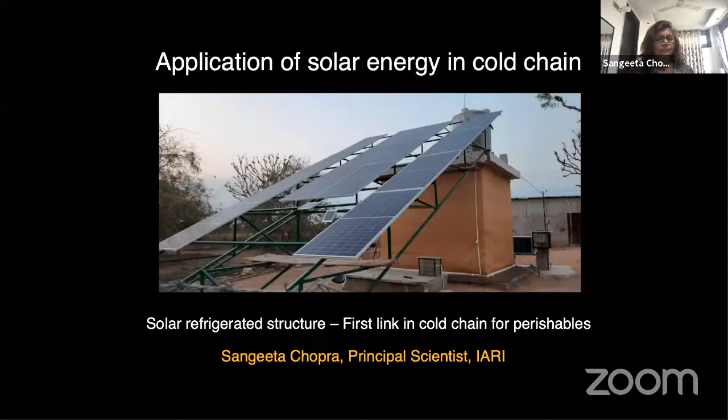The overview: in this presentation, I would briefly touch upon solar energy, solar photovoltaic panels, because that's very important when doing any work - the considerations, what characteristics we have to see, the inverters, a little bit about the cold chain, and the Pusa farm sun fridge that we have developed.

Many of you might know this, but just to remember: out of the total installed capacity in India of 382 gigawatts in March 2021, renewable energy sources, as you can see, the green part here is 25%, whereas coal is 55%. Photovoltaic energy out of this renewable energy contributes 8% of the installed capacity. Amongst the photovoltaic installed capacity, 90% is ground-mounted panels, around 7% is rooftop solar panels, and off-grid solar power is 3%, that is the solar water pumping.

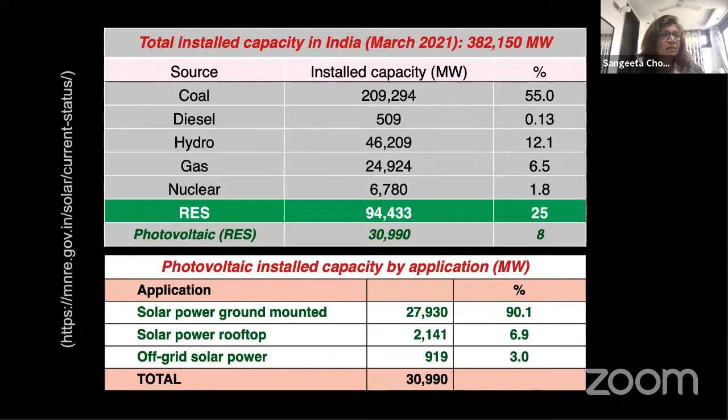That was the installed capacity, and this is the power generation. Electricity generation in India is around 100 billion units per month, out of which renewable energy contributes 10% of the total electricity generation - 11,241 million units. Amongst this renewable energy, you can see these bars, comprised of wind, solar, biomass, bagasse, and small hydro. The orange bar is solar, and the contribution is increasing every month. In February 2020, solar photovoltaic systems produced 5085 million units, around 5% of electricity per month.

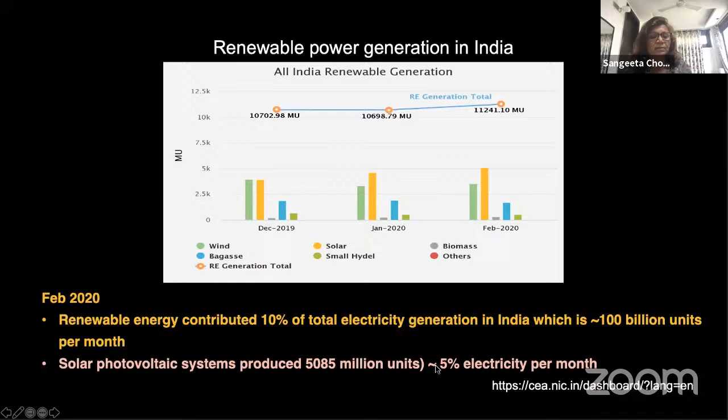Solar energy in India - we are endowed with a large amount of solar energy potential. The solar insolation is around 1,000 watts per meter square. About 5,000 trillion kilowatt hours per year of energy is incident over India, and most parts of India receive 4 to 7 units per meter square per day. That high amount of solar energy is here, and it's surprising that we have not used it. We should be using it more often for our cooling, processing plants, or any other systems we may want to run.

The primary part here is the solar photovoltaic panels. Just to revise a bit: it's made from crystalline silicon, absorbs photons from sunlight, releases electrons, which generates DC current. Each photovoltaic cell has an operating voltage of 0.5 to 0.7 volts. They are connected in series, and many of those series strings are connected in parallel. When connected in series, the voltage increases, and these strings in parallel increase the current - that's how the photovoltaic panel is made.

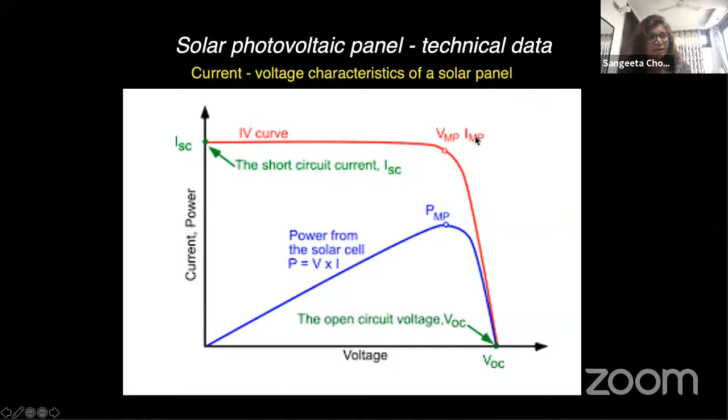This is one of the most important characteristics of a solar photovoltaic panel - the current voltage characteristics. You can see the open circuit voltage, VOC, is important - that's when the solar panel is not connected to any load, and if you connect a multimeter, that's what it gives. If it is completely connected without any load, then it's the short circuit current. Between these two, we mostly want to operate the solar panel at maximum power. PMP is the maximum power, obtained from VMP, the maximum voltage at maximum power, and the current at maximum power. These are the important characteristics.

Oops, sorry. Give me a minute, man.

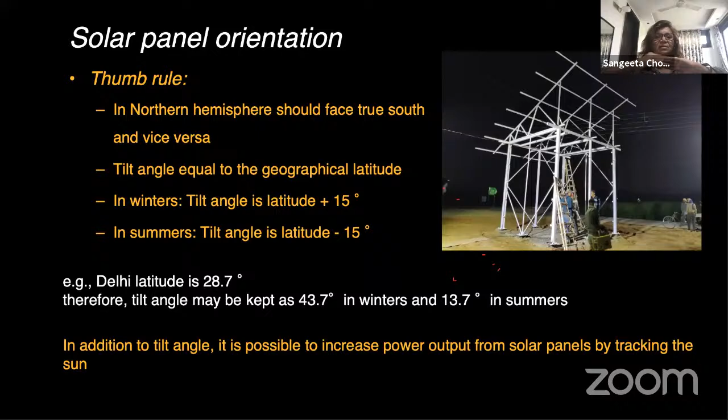Now, in addition to the tilt angle, we can also increase the power output if we are laterally changing along the solar panel, along that plane, towards the east or towards the west. So in the morning, the entire panel can face the east, and then keep tracking it and turn the other side to the west. That is possible.

I would like to show that these are called panel trackers, and they're on a mount that can follow the sun for getting the maximum sunlight. I wish we can do that easily. This increases, mostly you can get increased harnessed energy of around 15% in winters and 35% in summer, maybe a single axis or dual axis tracking, the automatic solar tracking controllers.

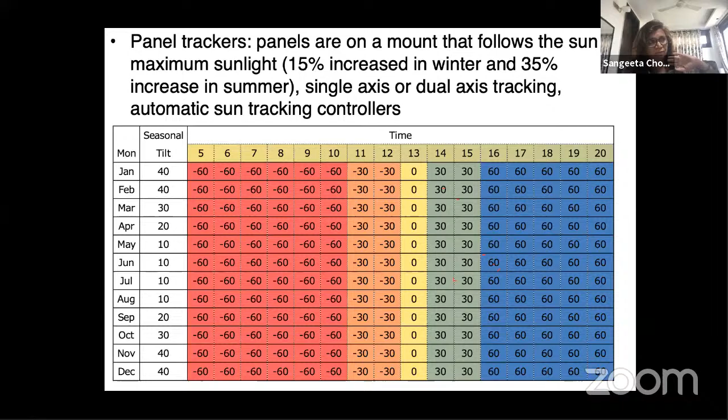So minus 60 is more towards the east. The entire panel is facing the east sun, and then that goes flat, keeps turning, and is right overhead, like 0 degrees looking upwards. That's around 1 o'clock, and then going towards the west to 60 degrees. So that's how I'm showing minus 60, minus 30, 0, 30 and 60 to the west. That's another way, and that is being done at places.

Okay, I want to go to the inverters next, because that is the next important criteria we would like to consider or match. It's very important to match, we may say impedance matching, or match all the specifications of the entire system. Various kinds of inverters are available, and we've been searching for them for a long time. Some of them do not suit our purpose for villages, but some did.

The first one we can see here is an off-grid inverter, which requires a battery. It's off-grid, meaning it has no electricity connection, but it requires a battery, so there is no operation without a battery. There are some specifications for a 5 kilowatt inverter - what is the battery voltage required, this is for one particular inverter. But what's important is that if I take out the battery connections, this inverter does not give an output, even if the solar panel is connected. So it's as if the solar panels are charging the battery, and then we are getting the output. Battery is an essential component, it works without electrical supply - that's what should be there. There's no operation without battery, and it does not need a grid.

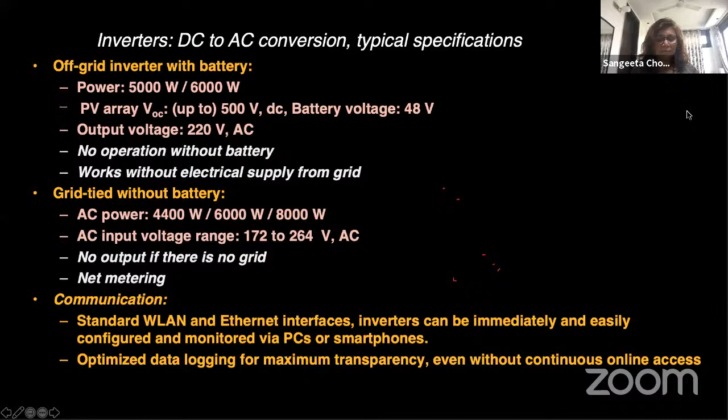Okay, it was simple. So the inverter that I am using is actually a hybrid inverter, but I am not using a grid and I'm not using a battery. Very few suppliers in the world are making this. Some of them claim to have this inverter, but when I bought them, they didn't work. So the inverter that I am using is around 5 kilowatt.

The maximum input I can give is around 500 volts. The battery specifications are written, but it can operate without a battery. It can also operate without grid - does not need battery, does not need a grid. I can use a grid if I'm constructing this structure in a village where there is some grid and we can get that advantage. I can use that. But honestly, in some villages where I've put systems in Haryana, the grid quality is so bad that my inverter got destroyed, because they have all kinds of wires hanging onto the village electricity supply. So that destroyed my inverter also.

Input voltage 220 volts, we do not need it. Presently, I'm not using battery, I'm not using grid, just solar panels, and we get an output of 220 volts. By far the best system that I have seen.

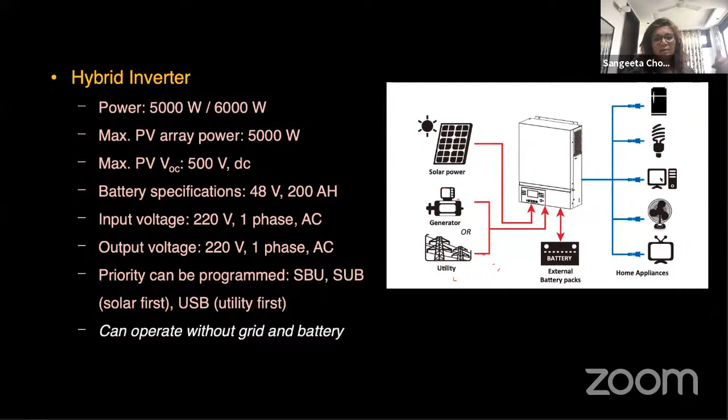And of course, if I'm connecting all three, there's a program, we can program it to solar first. So it is either solar first, battery - SBU is solar first, then battery, then utility, that is grid. Or it can be solar first, utility or battery, or it can be utility, solar, and then battery. That's how it will take the power. If the solar is less, it will take from the grid. But it can operate without any one of them - it can work just on grid, just on batteries, or just on solar.

Cold chain for perishables - we all know that a cold chain is required, and my team's effort here is to establish the first link in this cold chain: a cold storage that works without electricity and does not need batteries. And of course, then there's transport, processing and distribution.

I would like to say that we have pumps running in our place where there's no electricity, but this structure is working, for example, in Ajmer, Rajasthan, in Picholia village. So we are running the motor for washing the panels from the solar panels, and this is a 5 kilowatt system.

So if the structure is not in use, we can totally run some small processing machine from the same system. If we can run an air conditioner, we can run a machine too. And we are running motors and pumps for washing the panels and using the water. There's no electricity connection on that farm yet.

Now they have electricity.

Now you can see the same structure which I showed you, the frame. This is the Pusa Farm Sun Fridge, cold storage for farmers. This has been built on the Mela ground, built this year in the month of February for Kisan Mela. It was built in just 20 days and is working till today.

It is being used for storing produce from CPCT. The protected cultivation division, which is just behind the Mela ground, has a lot of produce and they sell in the market. But before they sell in the market, they often keep their produce in the sun fridge now.

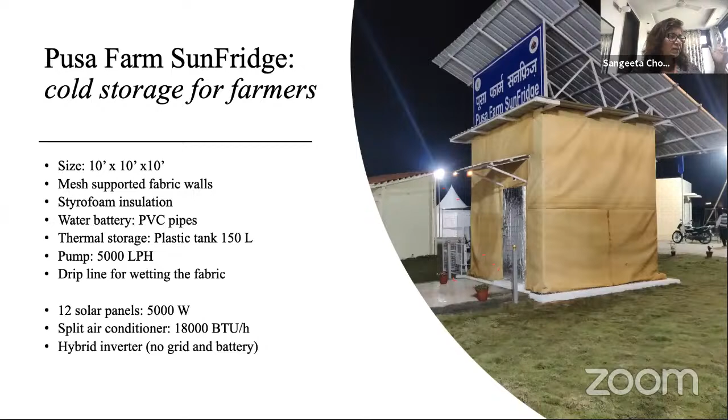We are using a pump here of 5,000 liters per hour, a drip line for wetting the fabric. In this, I've used 12 solar panels, each of 415 watts or so, a split air conditioner, and the hybrid inverter that I've talked about, without the grid and without the battery.

We've pulled out the circuit board inside and modified it so that we can get 2 to 3 degrees during daytime, and it goes up to 8 to 10 degrees at night, because at night there is no active cooling, it's just passive since there's no solar energy. So this is off-grid and batteryless, with a split evaporator coil and water battery for nighttime cooling - it automatically starts and automatically stops. As soon as there is solar energy, it starts by itself.

Now, this sun adaptive controller is something that we have devised. This is an important part of this structure, because if there are clouds or less sunlight, our system is going to draw less power. We've modified it so that the compressor and the air conditioner do not demand power if there is less sunlight. We are sensing the sunlight, and we've programmed it so that it asks the compressor to demand less power. That's how it continues to run and does not go into error.

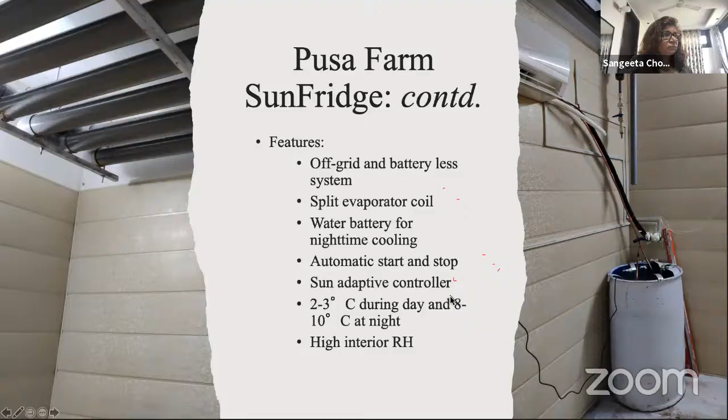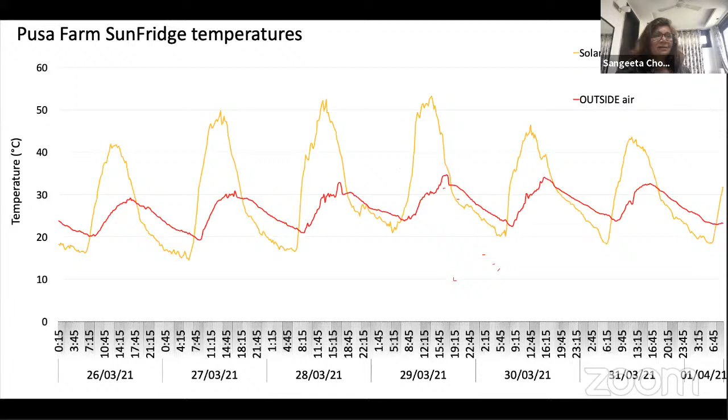The yellow line here now shows you the solar panel temperature. So you can see when the ambient is like 30 on a particular day, the solar panel temperature, this is the actual real data, goes more than 50. I know from my experience, I've seen this temperature of the solar panels shoot up to 60, 65. It's uncomfortable, but that's how it goes.

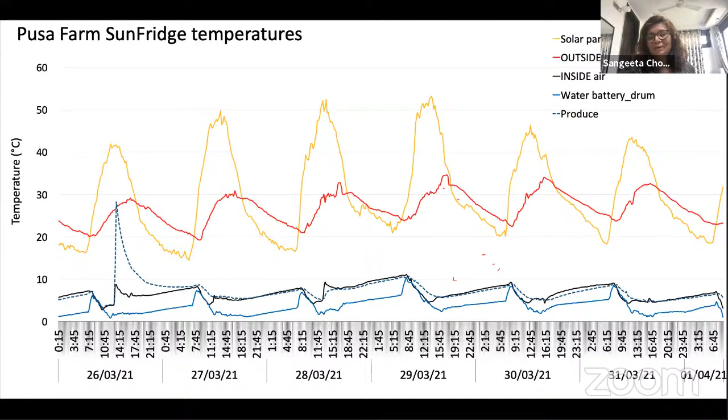What I can see is we are publishing the data. It's almost like 4 times that of ambient is the shelf life. And it's just like a refrigerator that you have at home, and better, because the RH, relative humidity, is pretty high.

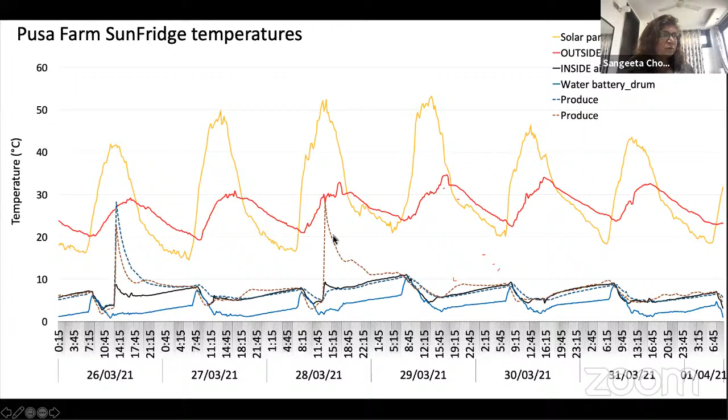And this is the other produce. Of course, we kept another produce, we keep putting produces. All these temperatures are measured by thermocouples. And this is when we put the produce again, and we've been doing this a lot lately.

But I think it's important to consider here that it is very, very important to decide whether our panels can withstand that wind speed. We don't want them blowing away if there is high wind. So the structural strength, the wind speed, the weather, the latitude are very important.

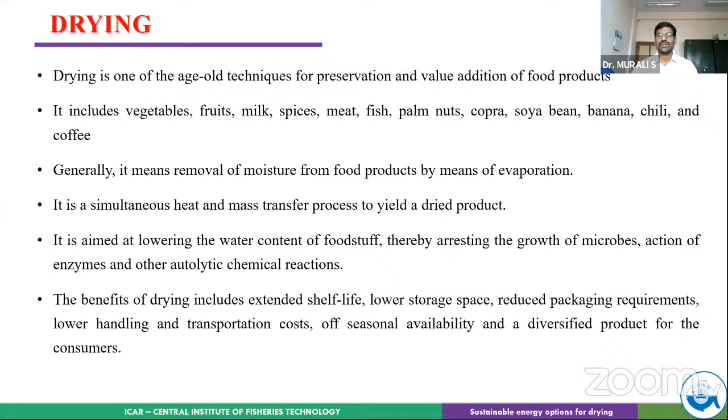So when we do the drying, the end moisture content will be low. In turn, that will help us in storing the product for longer time. There is extended shelf life, lower storage space, reduced packaging and handling requirements. Mainly, we will be able to give the product during off season. In addition, we get a value added diversified product that meets some of the consumers' demand. For example, in fish, some people like the dried fish, not the fresh one. So it is like a consumer's demand, a diversified product we can give through the drying process.

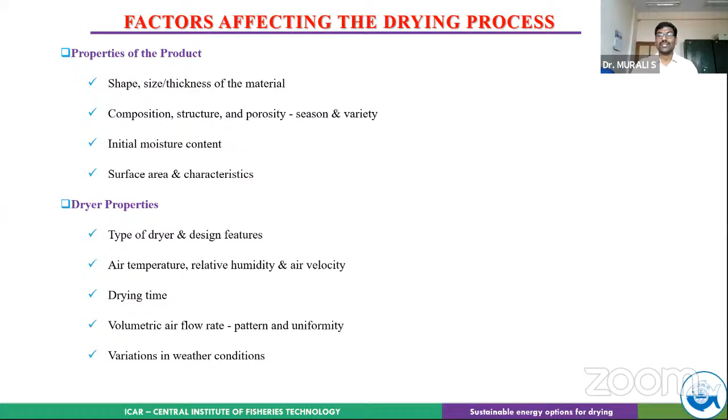So what are the factors affecting drying? You have the product parameters - shape, size, thickness, composition, moisture content, surface area. Then dryer properties - type of dryer, design features, temperature, relative humidity, velocity, drying time, flow rate, and weather conditions when we say solar dryer. So these are all the factors affecting the process.

Then we have the relationship between moisture and RH. In a food product, there is unbound moisture and bound moisture. Unbound moisture is just like free water, whereas bound moisture is attached with the food particles. So when we remove the unbound moisture and part of the bound moisture, we will end up in the equilibrium moisture content, that is based on the given drying conditions. Whatever temperature and RH we give, we will end up in one particular EMC. So then there is a relationship between drying rate and moisture content.

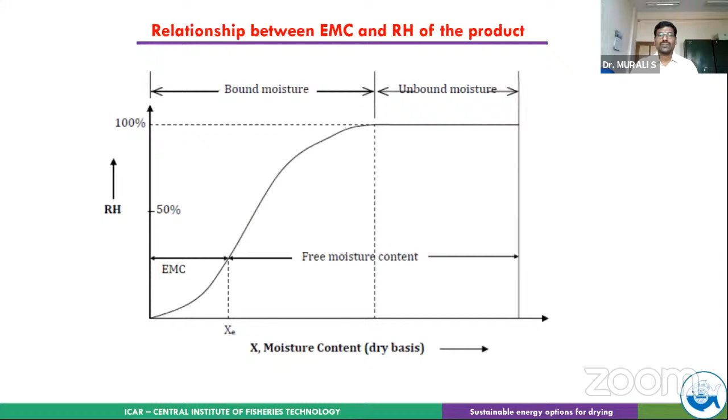Whereas in the falling rate drying period, there are two ways. One is the first falling rate, where you have unsaturated surface drying - it does not have sufficient moisture to give up. The second process is a diffusion process, where the moisture has to come out from inside to outside. So that's how these two drying rate periods are there.

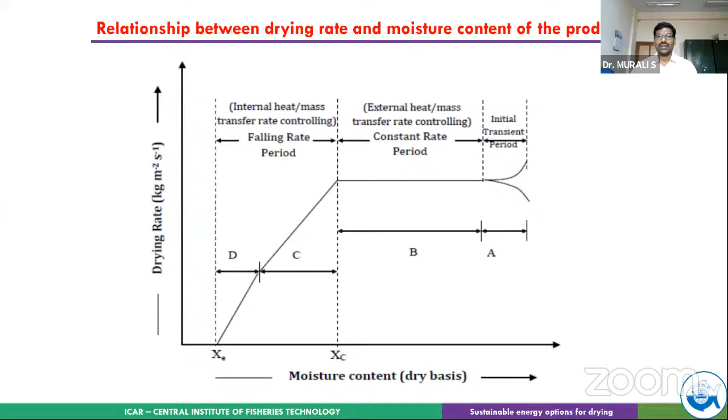Then we will come to solar drying. Basically, for the next 20 minutes I will be talking about solar dryers and the solar drying process. This basically has some advantages over other drying methods. First of all, it is environment friendly and economically viable.

In solar drying, what we will do is make a simple structure in which we try to enhance the effect of solar radiation as well as the natural flow of wind. By doing so, we will be able to get higher temperature, lower RH, improved drying rate, and lower final moisture content. And also, finally, we will be getting lesser time for complete drying of the product.

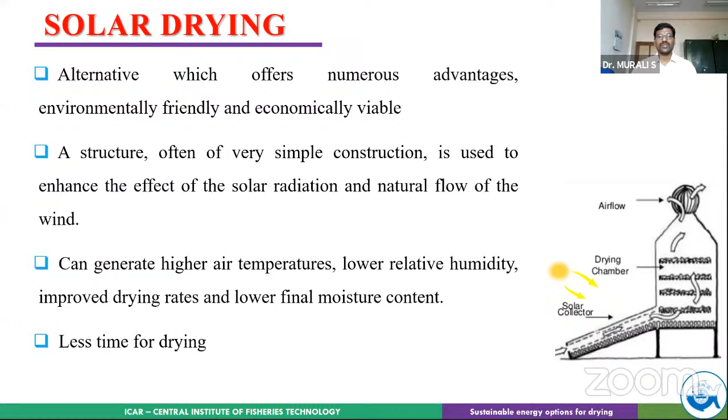So what are the essential parts of the dryer? You can see it in the figure also. There will be a drying chamber, a thermal collector - solar thermal collector, maybe an air collector or a water collector - an air flow system, and you should have an inlet and outlet.

Then there are different types of solar dryers. One is direct method, indirect method, mixed, hybrid, and different researchers have classified them in different ways. In the direct method, you will see that the product is kept just below the glass cover.

When we say indirect, you can see the figure on the right side - there will be a glass cover down, but the product won't be kept there. The product will be kept separately in the drying chamber. When we say mixed, you have both - you will be keeping the material under the glass cover as well as in the chamber.

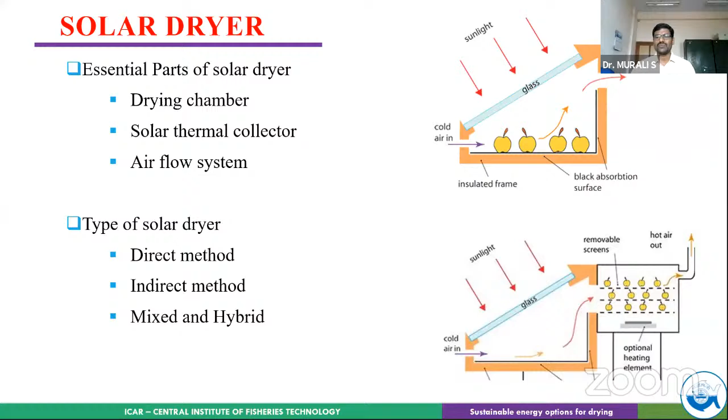When we say hybrid, you will be including a backup system - any auxiliary heating source will be included.

So one of the classifications from Lingayat et al. 2021 - they have done the classification based on whether it is natural convection or forced convection. Then it is based on whether we are using sensible heat or latent heat. Again, whether it is direct, indirect, mixed, or hybrid.

Direct means you are directly exposing the product under the glass cover - so whether it is cabin based or greenhouse type. Again, if it is greenhouse based, then what is the type of flooring we are using? Whether it's a concrete floor, or black painted, or a sheet, or sand floor. Then there is the type of glazing material.

Basically, when we go for low-cost dryers, you will see that polythene sheets are used - UV stabilized polythene sheets are used for low-cost solar greenhouse dryers. Also, polycarbonate sheet is used, and fiberglass is used. So based on that also we can classify.

Then there is the structure - whether it is a single roof, double slope roof, parabolic shape, or tunnel shape - accordingly it can also be classified. Then whether you have north wall reflectors, to enhance the solar radiation inside so that we can get maximum heat, or you are not using north wall reflectors. Based on that also we can classify.

When we say indirect dryers, you have solar collector based dryers that I will be discussing in detail in subsequent slides. Then there are thermal storage systems - some materials will be kept inside the glass cover so that the material will gain heat during sunshine hours and release it during off-sunshine hours. Say you wanted to dry the material at night time, or in the rainy season or on a cloudy day - these things can be taken up. Also, there is a solar water heater based air-water heat exchanger that I will also be discussing in subsequent slides.

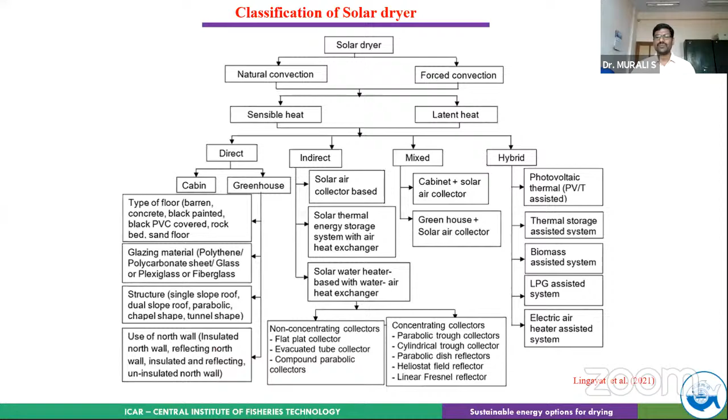Then the second one is thermal storage, as I already discussed. Then you can have a biomass assisted system, or an LPG assisted system, or it can be an electrical assisted system. One by one I will be discussing in subsequent slides.

Fudholi et al. 2010 have given the common agricultural products and what would be the initial and final moisture content, the maximum allowable temperature, and how long drying takes place. This is based on solar drying. The maximum allowable temperature is given, initial and final moisture content is given, how long it takes is also given. You can see the figure on the right side showing different types of products. All the agricultural materials can be dried in this way.

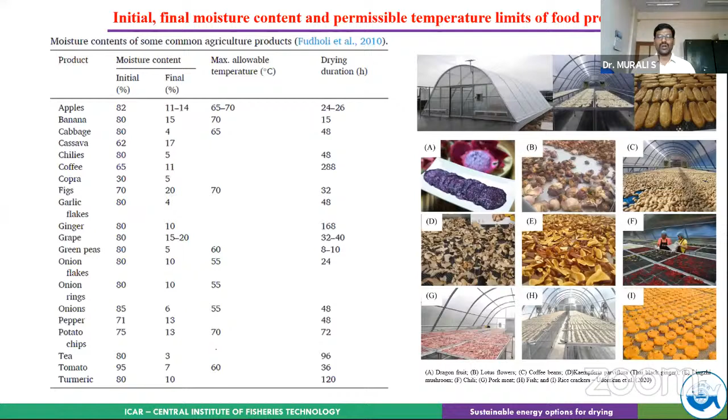Now I am going to the main topic of this presentation, that is dried fish. About 17 to 20% of the total catch of fish in India is dried for export and local consumption. Whenever there is excess catch or low value fish, when sold fresh you won't get much price, or the product will spoil very early. So during these situations, these types of products can be dried.

There was a study in the Southeast Coast Harbor. They found around 25 species are dried for dry fish production, and about 2,000 to 4,800 tons of dry fish production is happening in the Southeast Coast. These dried marine fishes are transported to inland areas for domestic consumption. There is a report that dry fish contributes about 7% of total fish export. APEDA in 2016 reported that dry fish with MAP, modified atmospheric packaging, properly packed, can increase this contribution to the total fish export to 25%.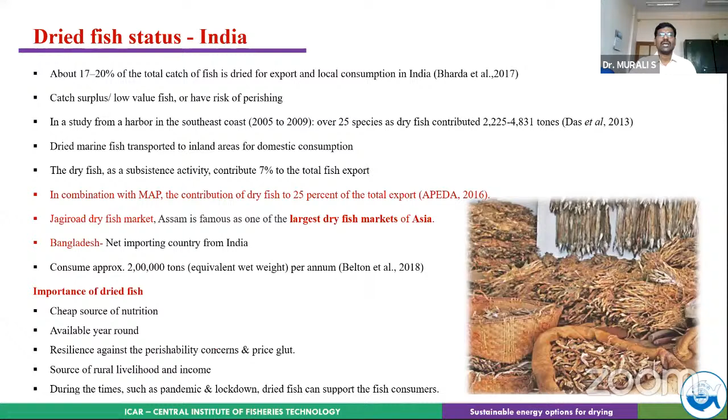When done traditionally, the fish is directly exposed to incident solar radiation and natural wind, because the energy is free, renewable, abundant, and this method is cheap, with no cost incurred. But the product quality is inferior, since it depends on weather conditions, and it is vulnerable to dust, insects, pests, and microbial infestation. Studies show that at least 30 to 40% of total dry fish production is lost during open sun drying.

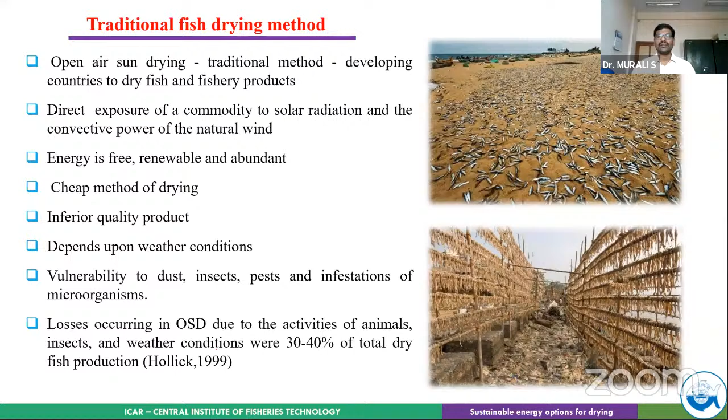Keeping these issues in mind, different researchers have developed various dryers especially for drying marine products, and have gotten good results. Now I am going to talk about our CIFT initiative, the types of dryers we have developed, and subsequently the results we are getting. I will also go into details of how the dryer works, and what energy efficiency we are achieving.

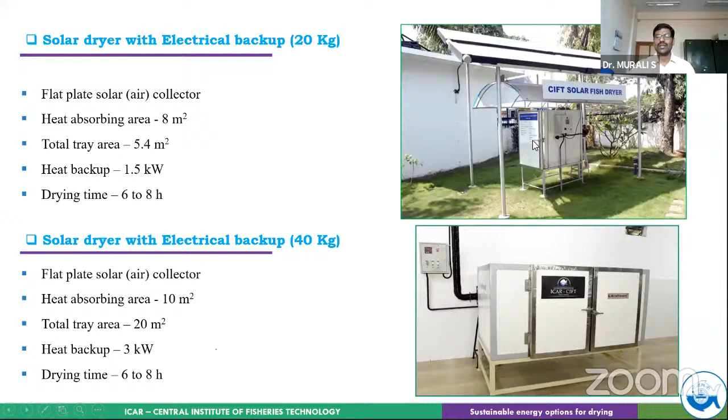Similarly, we have a 40 kg dryer working on the same principle, with a flat plate air collector, blower, drying chamber, and heating coil. Next is the solar LPG hybrid dryer.

Once we start the dryer, cold water from the tank, at about 25 degrees Celsius, is circulated through a pump to the collector. Once circulated, it gets heated up, and the heated water then comes back and is stored in the same insulated tank, which acts as a thermocline system. You will see that the top has hot water and the bottom has cold water, because due to density difference, the hot water stores at the top and cold water stays at the bottom.

Why? Because when it is going inside the heat exchanger, it is releasing its heat. Upon releasing its heat, it will be cold. So obviously it will come and connect on the bottom side.

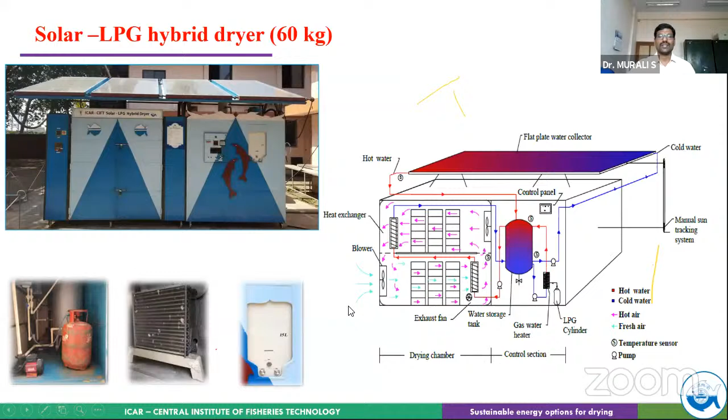We also developed a solar tunnel dryer. This is basically a polythene sheet. This is not a very new technology, however we are trying to customize it for the benefit of the fisher folks. The ultimate users always come here and ask for low-cost technology. They don't want a hi-fi technology, so they can afford it.

This dryer will cost about 70,000 rupees. You see the UV stabilized transparent polythene sheet is used for the roof, and the black absorber sheet for the floor. Then we have got CPVC pipes only. If a permanent structure is required, that also we are capable of doing, we are doing it already.

We have also connected this with PV panels, so we don't require separate energy. There will be a panel nearby, through that the fans will be running. We have not given heat backup, so the drying time will be slightly more, and it is for an affordable bulk dryer.

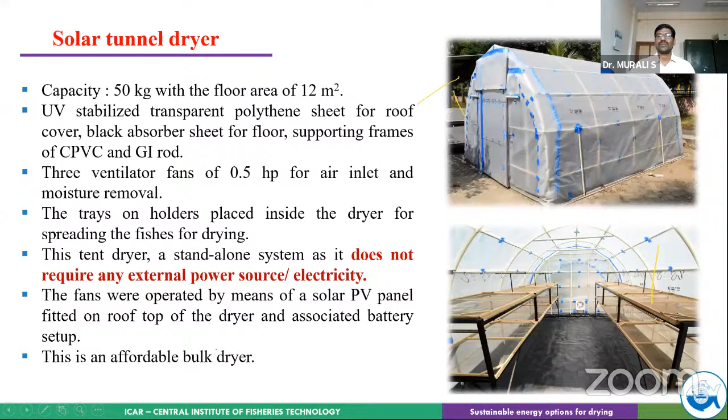Say it is 1.5 lakhs, we can dry about 50 kg of fish, whereas when we go for chamber type dryers at the same 1.5 lakhs, we cannot dry more than 20 kg. Then these are all the experimental results.

You may be asking this question, why is the moisture content more, it is 30? See, it is a salted one. So when salted, as per our standards, BIS standards as well as international standards, even the moisture content on the material can be as high as 40% on wet basis, even 45% based on the requirement.

So when we dried it with the solar hybrid dryer compared to open sun drying, we found that within 8 hours we can dry it in our hybrid dryer, whereas in open sun drying it takes about 32 hours. This is because we are trying to maintain the optimum drying conditions with the help of backup heating systems, so the drying rate is also higher.

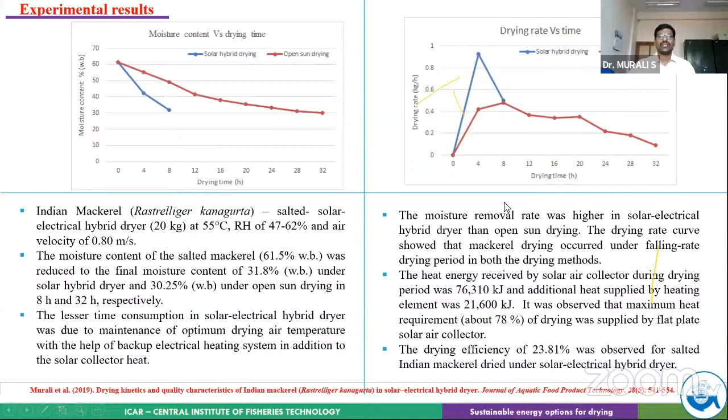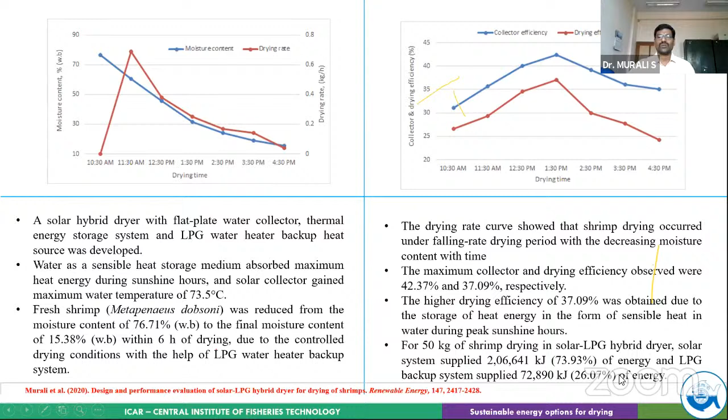Then we have dried this material to 15% wet basis, and within 6 hours we can do this. Similarly, you can see here the collector efficiency is about 42%, 37% is the drying efficiency. You can also see here about 73%, 74% of energy was supplied through the solar system, and the LPG supplied the remaining 26%. I also have a comparison chart I will show you.

Then we also did a quality analysis. You can see the proximate and biochemical analysis of the dried shrimps were carried out. We found that it's not significantly affected by the drying process, and it is microbiologically safe. Also, we have done the shrinkage rate, rehydration ratio, color attribute, everything is within the limit, and the product is good quality, hygienic, and uniformly dried.

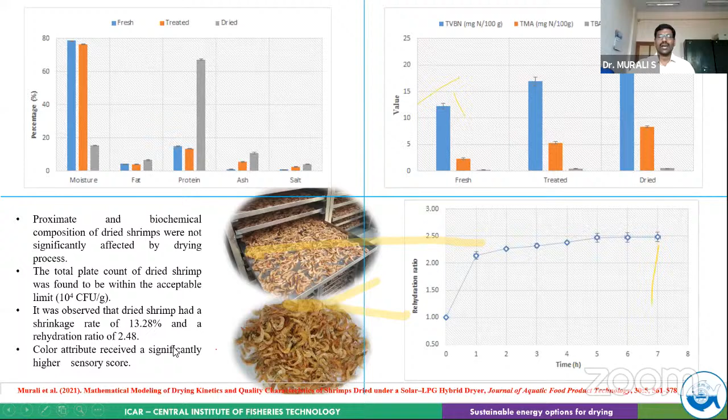Then we have also done an energy analysis. You can see it here: solar electrical dryer 20 kg, 40 kg, 60 kg, 250 kg, 50 kg tunnel dryer. The dryer costing we have given. Operational cost is about 3 rupees, and drying time is 6 to 10 hours. Manpower required is only 1.

If it is operated in a hybrid mode with solar and electrical, you end up with 1795 units per annum, for about 240 operational days. Whereas if you are only using electrical, you will end up with about 4,500 units of electricity.

You see for the same 40 kg dryer, and for the LPG 60 kg dryer, how much difference is there in terms of energy? About 40 to 50% difference is there in the energy consumption.

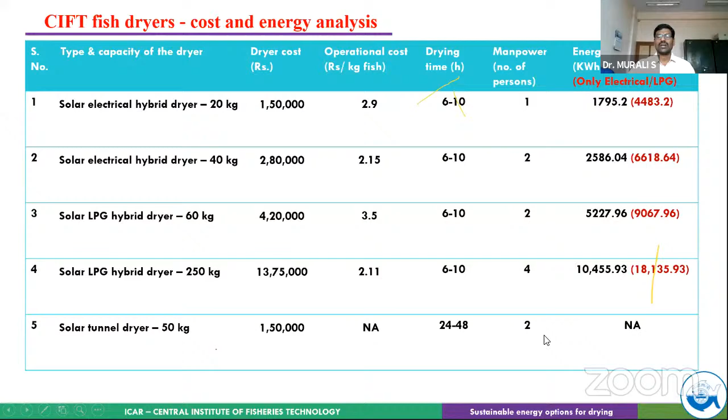When it comes to the tunnel dryer, we have not given a backup system. This actually only has maintenance charges, no operational charges. Drying time will take about 1.5 to 2 days, and 2 people are required for labor.

We also have developed a system to get the details of drying. Most of the time when we do the experiment, we don't know the temperature of drying, or the temperature in different zones. We don't know the temperature profiling inside the drying chamber, or what the RH is. So if you want to know, we have to open it and check, or we can have a data logger from outside.

However, when we give this to the ultimate user, the client may not be an expert. So he wants to know what is happening inside the dryer - how much drying has happened, how much moisture has been removed, when drying will complete, all those details. So we have developed a system with sensors for temperature and RH, and there will be a load sensor, based on some assumptions.

Based on that, there is an Arduino board, a load sensor, and a GSM module. With this, we will be able to get the SMS. We have to feed in your mobile number. Upon feeding it, you will get a message when the item is kept for drying initially. Then we can set the time interval for when you get the message - maybe after 15, 30, 45 minutes, or after half the drying is over, or if it is completely dried. So all the details we can get through mobile.

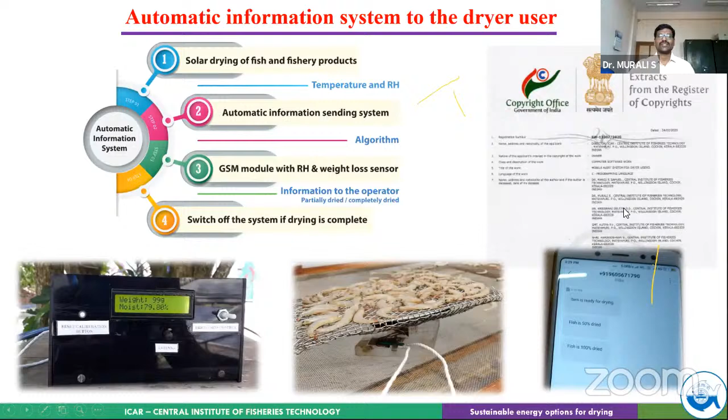We have actually got the copyright for the algorithm we wrote for this. This system we have not yet commercialized, but we have already experimented with it. We also want to control the switch of the dryer itself when drying is over - we are presently working on that. So this is about the automatic information system for dryer users.

Then overall, what are the advantages? We have different dryers suiting different requirements. Energy efficiency - you can see about 42 to 59% less energy required for the solar system. It is renewable, no emission, no fossil fuels are used because we are using renewable energy. It can be easily installed and operated, and the operational cost is very less.

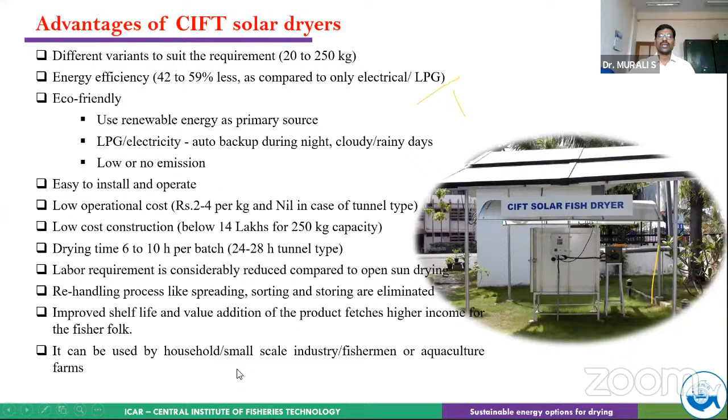Construction also - if you take a 250 kg dryer, it comes to less than 14 lakhs. The drying time per batch is also 6 to 10 hours; if it is a tunnel dryer, it will be a little higher. Labor requirement is also considerably reduced because you don't need to turn it. Once you put it inside in a single thin layer, we don't need to go inside and shuffle it. So the labor requirement is very less. Then there's improved shelf life, value addition, and it can finally be used by any individual, small-scale industries, fishermen, or aquaculture farms.

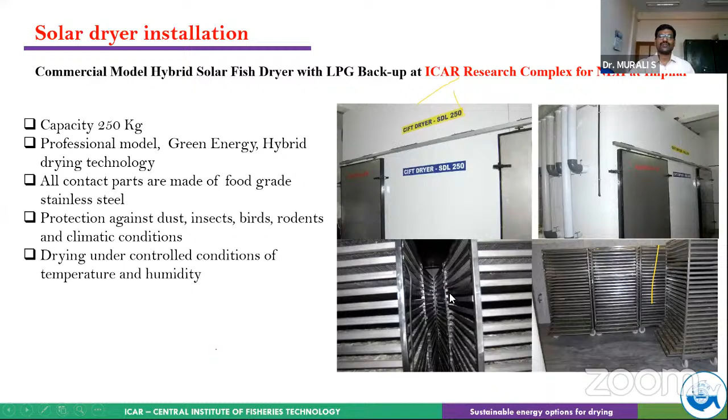Then, which are the places we have installed this dryer? You can see this is a solar LPG dryer, 250 kg capacity. We have installed this at the ICAR Research Complex for the Northeastern Region at Imphal. This is a professional commercial model. You can see all the parts here - these are the trays, SS trays, 304 grade.

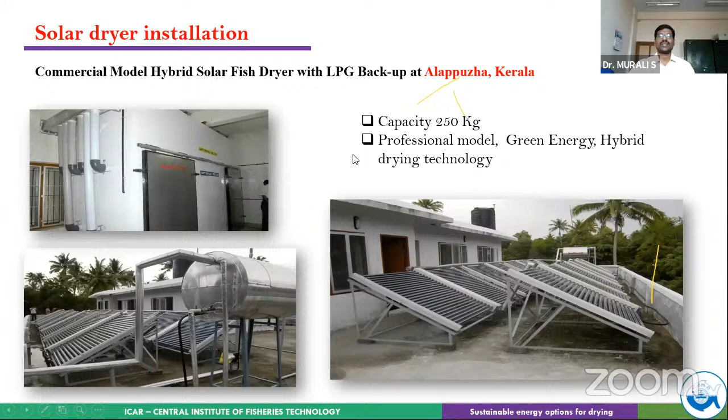We also installed one more dryer of the same capacity, 250 kg, at Alappuzha, Kerala. This is also the same principle, an LPG system, but instead of one LPG unit, here we have 3 numbers, and the burners will be 4 or 5. According to the requirement, it can run based on the temperature sensor - it will run the required numbers.

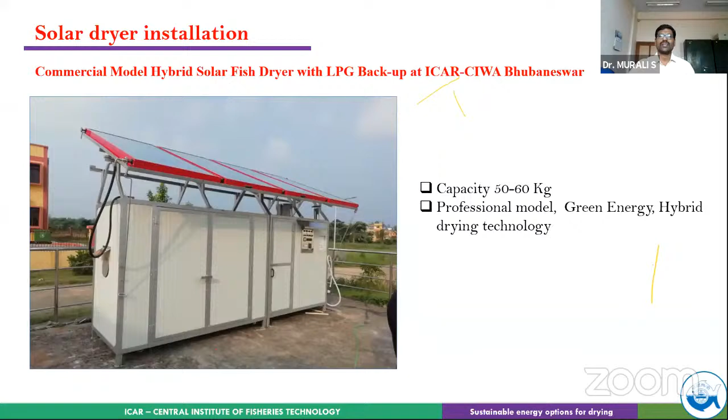We also installed a solar electrical dryer at the Directorate of Fisheries, Manipur, a 100 kg solar electrical dryer working based on a flat plate air collector. We also installed a commercial model hybrid solar fish dryer with LPG backup at ICAR-CIWA, Bhubaneswar, which is also working well there.

Now recently there is a walk-in type solar tunnel dryer. I already showed you the temporary model. This is a permanent structure made with polycarbonate sheet of 6 mm thickness with a GI purlin. It will be a permanent structure, with Kadapa tiles for the bottom.

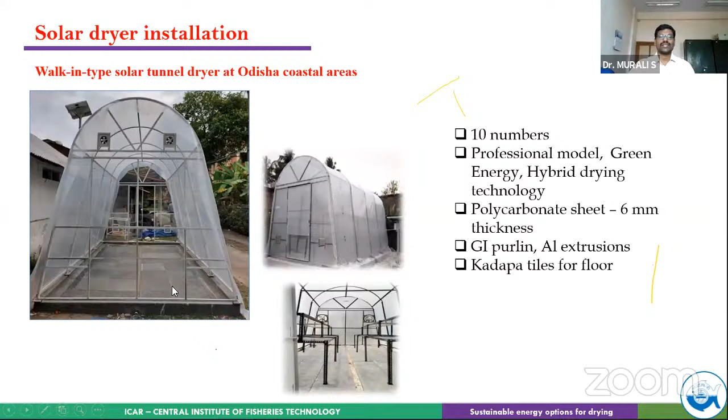With the World Fish project, we are giving 10 of these dryers to the Odisha coast. This has already been installed, but due to a cyclone, we have also removed it now. So it can be installed, and if needed during any exigencies, it can be taken out. The bottom structure is plain concrete with Kadapa tiles, and the top portion can be taken out if required.

Through our ITMU-ABI section, we have empaneled manufacturing agencies for fabricating our dryer and supplying anywhere in the world, including India. Over the last few years, we have supplied more than 30 dryers, to Andhra, Karnataka, Northeast, and Odisha. We have different capacities, and as of now, our installed capacity is about 1,400 kg of dryers.

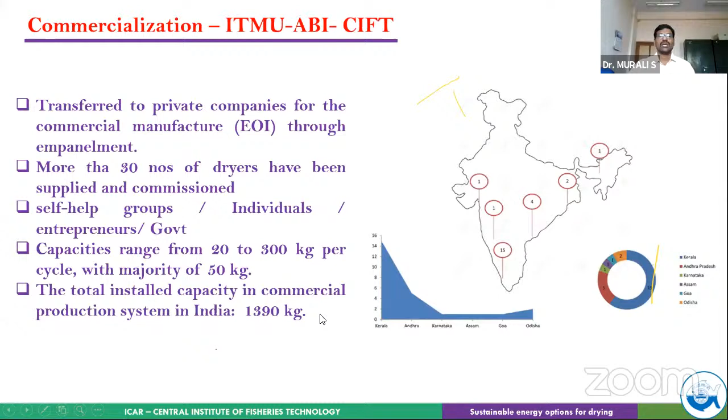Then I was talking about entrepreneurship development. What we do is conduct drying trainings, about 2 to 3 days of solar drying training at CIFT. Interested people come there and get trained. Upon getting trained, they register with our ABI ITMU section and are called incubatees. We enroll them for 6 months, during which they bring their produce.

This can be replicated for any products. For fish, they bring it and dry it in our campus. This facility is given for 6 months. Upon drying, they get to know the technology and do test marketing. If they see the technology is working well, they finally come to us and take the dryer with the help of the empaneled agencies.

What you are seeing in this slide are some installations at Kerala. It is installed on the rooftop, about a 20 kg solar electrical dryer. There is a 40 kg installation here, also in Kerala. Then you see one dry fish shop, developed with CIFT guidance by one of the young entrepreneurs.

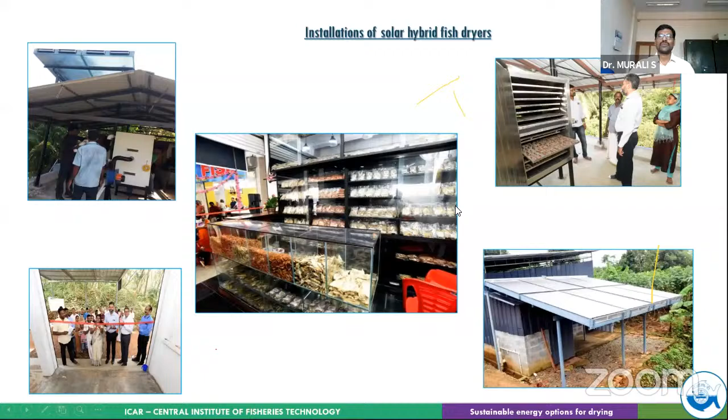You see all the fish are dried and kept just like in a bakery, like nuts they have been kept. Anybody who goes there will get tempted to purchase different items. So it was one interesting initiative by one of our incubatees.

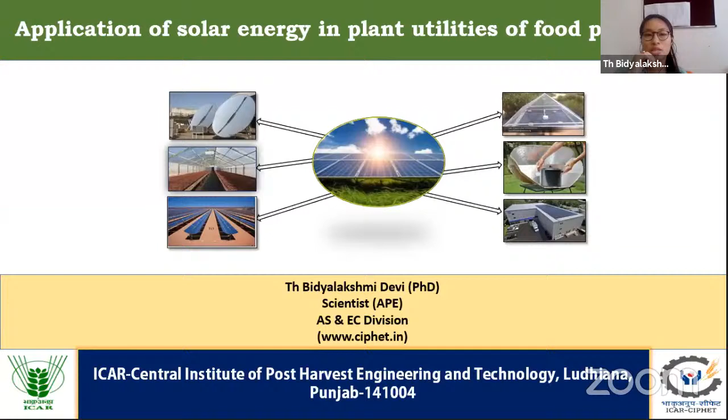I'll be presenting on the topic of application of solar energy in plant utilities of food processing. Other than what Sangeeta Ma'am explained about cold store and cold chain, and Murali sir presented about dryers, I'll be covering other applications which we can use at the domestic level as well as in food processing plants.

I'll discuss renewable energy in the post-harvest sector, solar energy and its advantages, and application of solar energy in food processing. So why solar energy? Why, what it is, and what is it? Why it is very much important and needed.

We know that population is increasing. Due to the increase in population, the demand for energy is also increasing. Cost of fuel is increasing, and due to the reduction in conventional energy sources, people nowadays are searching and focusing on alternate sources. What would be the options since conventional sources are limited? What would be the alternate source for energy?

So focus is made in the renewable energy. Moreover, it is freely available. It is a green source, and solar energy becomes the ultimate energy source because directly or indirectly, whatever energy comes, either biomass or petrol or fossil fuel, everything has come through the solar energy, directly or indirectly. Moreover, the government has also provided different schemes and missions related to solar energy to improve and popularize its use.

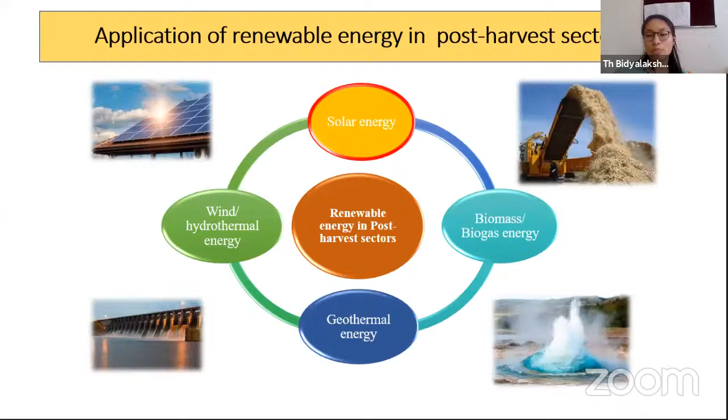So why solar energy and what are its advantages? First of all, from solar energy we can get both thermal and electrical power simultaneously. By using a thermal collector we can get heat generation or thermal power, and electrical power we can accept through the solar photovoltaic panels.

On the other hand, it is also freely available, inexhaustible, abundant, environmentally clean, and now it becomes a promising alternative energy source. Hence using solar energy in post-harvest sectors is a sustainable way.

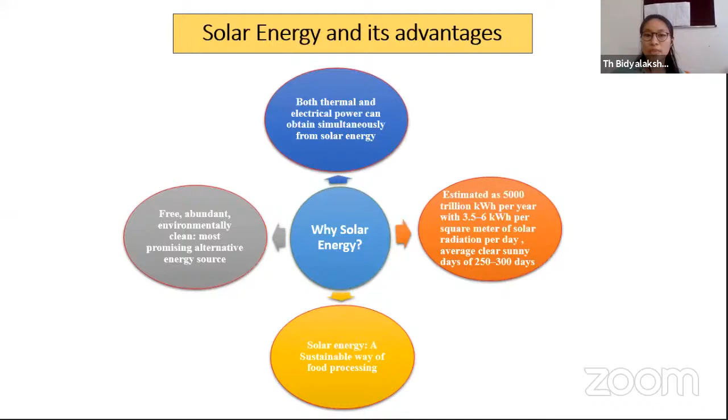As shown in the graph and the map, it is reported that India has 5,000 trillion kilowatt hour per year with 3.5 to 6 kilowatt hour per square meter of solar radiation per day, with an average of 250 to 300 clear sunny days. That means we had a very good potential of solar energy, so we should harness and use it as an alternate source of conventional energy.

So application of solar energy in food processing in the post-harvest sector - there are a lot of applications wherever energy is required, either electrical or thermal source, as I had mentioned. The post-harvest sector is a very energy-intensive zone, requiring very high amounts of energy, and hence a major part of it can be met by solar-based systems to achieve sustainable growth.

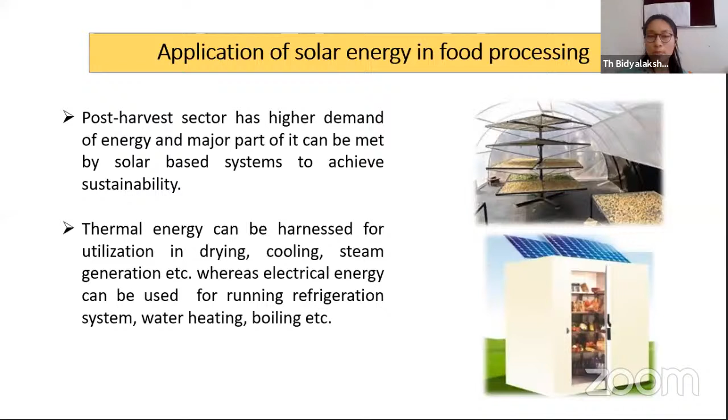Thermal energy can be harnessed for utilization in drying, cooling, steam generation, whereas electrical energy we can use for water heating, for boiling purposes, for electrification, for the operation of solar appliances, equipment, or machineries of post-harvest processing.

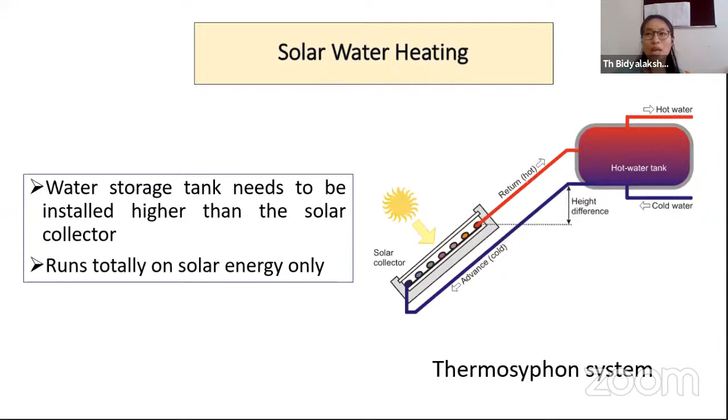So solar water heating is a simple natural process, a thermosyphon system. In this, due to the convection process, hot water will rise to the top part of the water tank once it receives energy from the sun, and hot water will get collected while cold water supplies, as shown in the figure. This can be installed either in the laboratory, for household purposes, or in a processing plant, wherever hot water is required.

Again, this is forced circulation. In this one, the water storage tank can be installed at any place since we are using a pump, and this requires electricity to operate the pump. This electricity, once again, we can provide through the solar photovoltaic panel, and hence the entire heating process of this water can be done through solar energy.

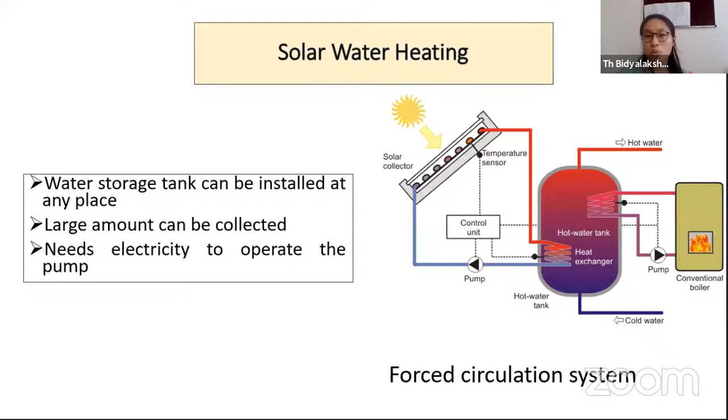On the other hand, in the concentrating type community solar cooker, there will be a focus point where the cooking pot is kept, and all the rays will be concentrated and focused at that particular point where the product is being kept.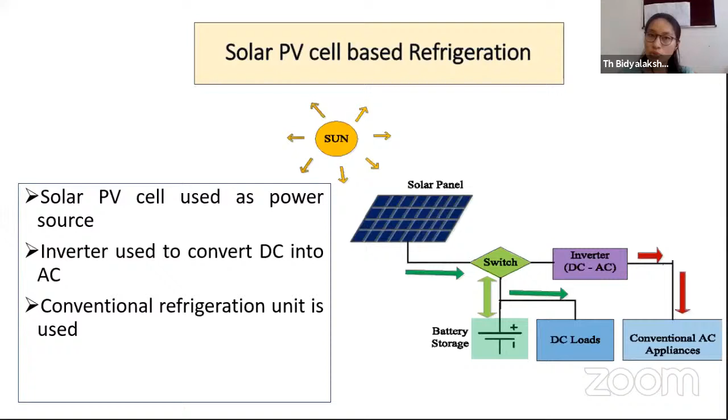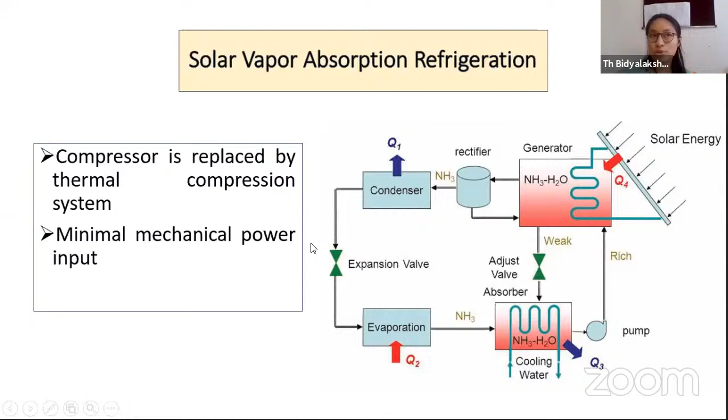Similarly, for the solar vapor absorption system, we need heating of the refrigerant. So for both the heating and the operation of the pump and other components, we can use both the thermal and electrical sources of solar energy.

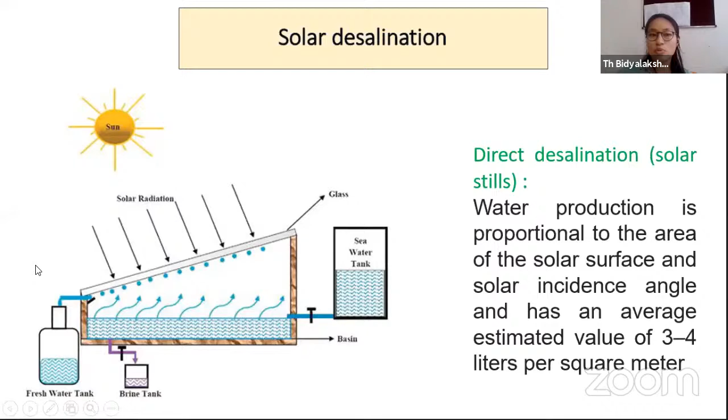Next is the solar desalination unit, usually done for making drinking water. From saline water, when we evaporate the water, it gets condensed and collected on the other side, while the salt present in the water gets collected at the bottom since it does not evaporate. This is the fundamental principle of solar desalination. It depends on the area of the solar surface, meaning the exposure area, and also the incident angle.

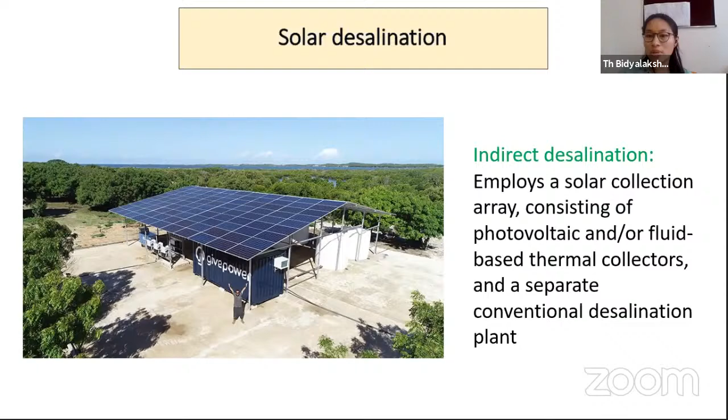Indirect desalination covers other methods like using the solar photovoltaic panel as an energy source to operate the desalination unit system. It may consist of a thermal collector and may also include photovoltaic components.

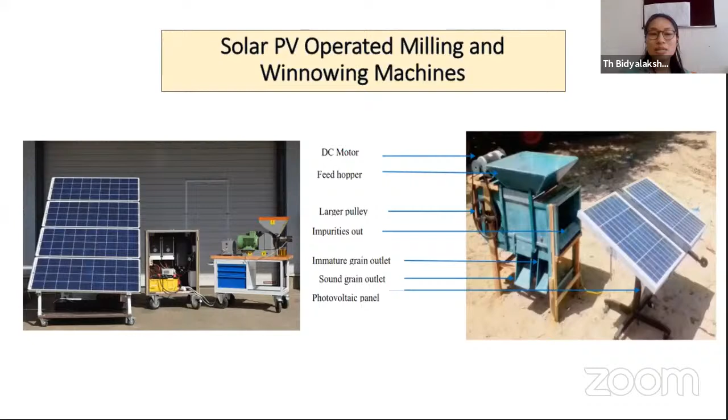Other than that, in food processing, if heating is required, such as boiling, blanching, heating, or drying, in such cases we can extract the thermal energy of the sun from solar sources.

Dr. Murali has also explained about the solar dryer, and I would also like to brief a little about this as part of this discussion. So why do we go for the solar dryer?

From time immemorial, since ancient times, sun drying has been practiced for the preservation of crops. However, sun drying has certain limitations, including damage to the crop by animals, birds, and rodents, and degradation in quality.

Hence, the solar dryer is important. On the other side, solar dryers are very common and widely researched because other drying methods, like commercial tray dryers, vacuum dryers, and freeze dryers, are very energy intensive and not easily affordable to farmers.

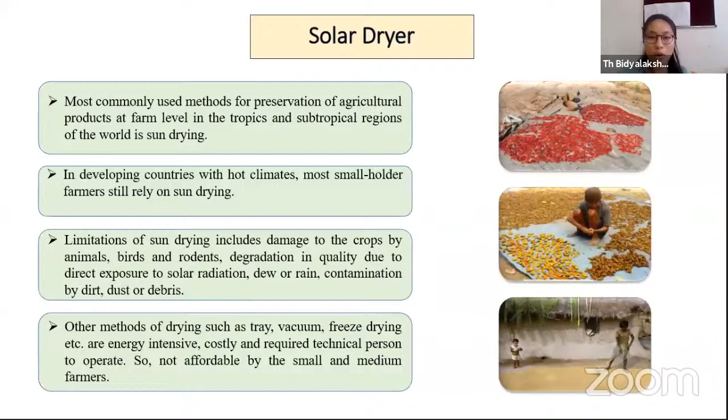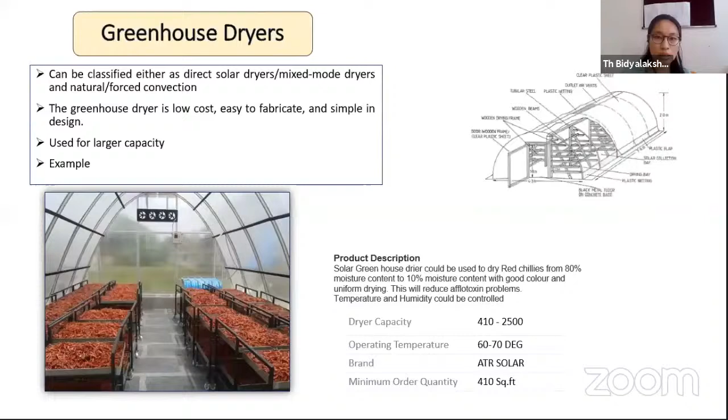It is made of transparent polyethylene covered with UV and water resistant material, and it acts like a bubble.

This setup is meant for drying paddy, wheat, etc. For mixing purposes, to ensure uniform drying, a rod or similar tool is rolled mechanically or manually, allowing the mixing to be done during the drying process.

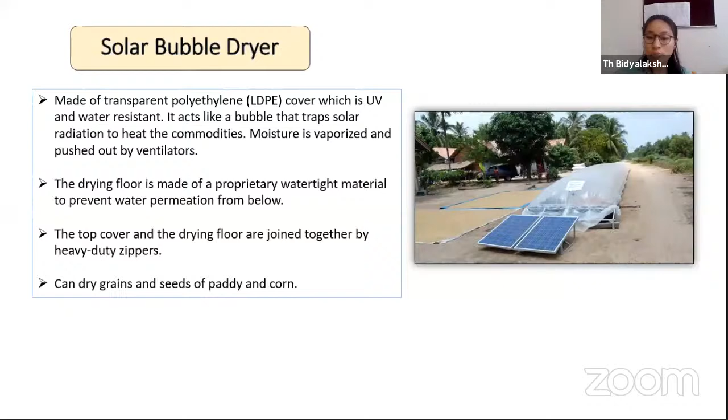So that's all from my side. Thank you very much for this brief on the different applications of solar energy in the post-harvest sector.